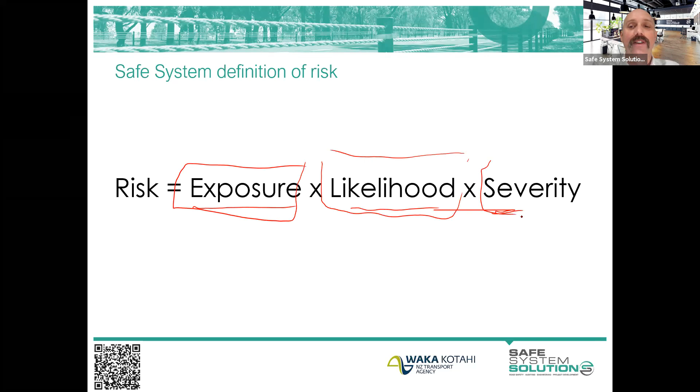And I gave you a few examples of things that influence the exposure the other time. So this one is still a little bit hard to see, but blocking off a road, an intersection, or the like alters the exposure, because the number of vehicles or pedestrians or cyclists will be influenced by that.

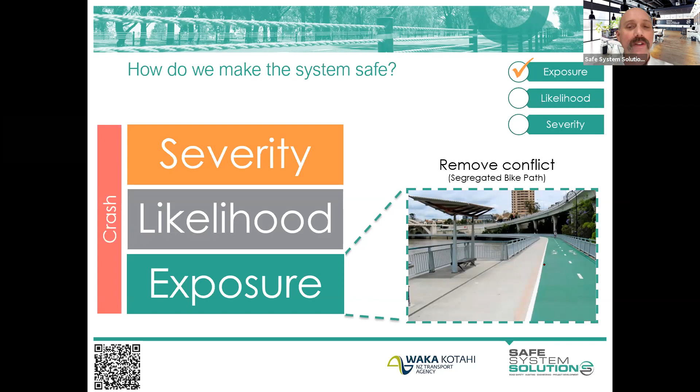The separated shared path facility changes the exposure, or removes the exposure, to vulnerable road user crashes with passenger vehicles. There's still a cyclist to pedestrian issue that could be present, probably a lower risk—definitely a lower risk issue than the passenger vehicle one. But those are some of the factors that influence the exposure.

This is actually out of the Safe System Assessment Framework document from Austroads. It's a bit of a definition which might assist you. Road user exposure refers to which road users, in what numbers, and for how long they're using the road, and are thus exposed to a potential crash. The measures of exposure include AADT, the annual average daily traffic, side road traffic volumes, number of motorcyclists, cyclists, pedestrians crossing or walking along the road.

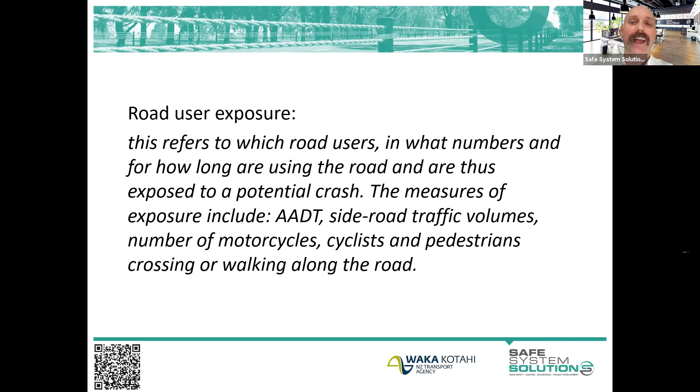It's fairly much boiled down to just numbers—the numbers crossing, the numbers walking along the road, and the like. The one thing that had a lot of debate in the 3 years since the assessment framework has come out was around the length of time they are exposed within an area. I talked about the size of the intersection as an example, because that one eventually got clarity and made everybody comfortable in a certain way that happens.

Okay, I'll pause there for any questions or comments at this stage about the assignment or any clarity around some of that exposure score.

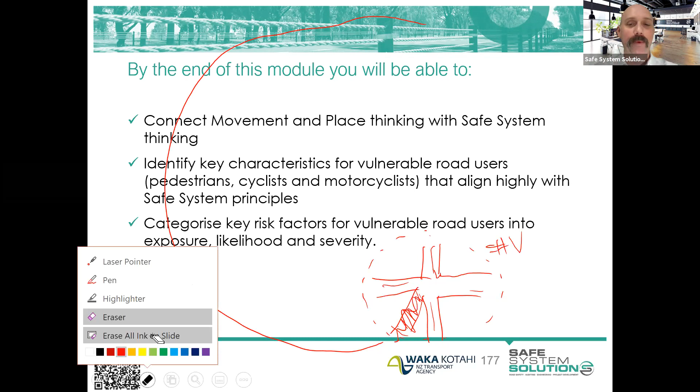Any other people have grievances on their score already? That's fair enough too—that's how we learn.

Well, the challenge, I suppose, was that we were trying to categorize these things with an end game of this assessment framework, which we haven't quite got to the details of. Now, in reading the assignments, I could almost see that some people had been using the Safe System Assessment Framework before, and others probably hadn't ever used that methodology. Anyway, overall everybody did really well.

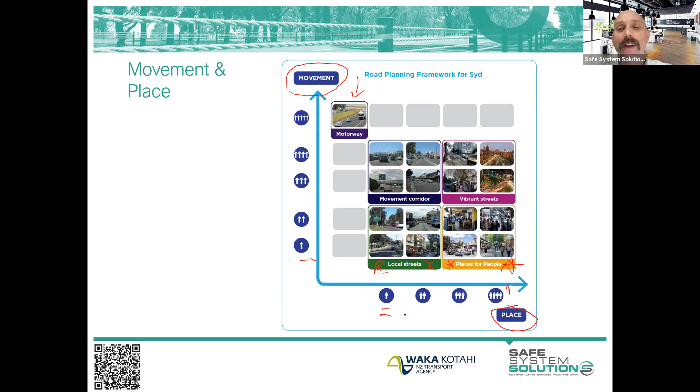Now, the challenge you have with local streets and the like is we start to talk about these as low place value. Obviously, the individual residents don't like us talking about their local street as low place value. But in the scheme of the whole network and the relativity of it, we sort of have these as low place value overall for the collective of the community.

But be careful with your terminology if you're out there doing your consultation and say, we made this decision because there's low place value here. That's not a good thing to say.

Then let's go up to an area that has low place value, but high movement function. And we see these are the movement corridors. And these are very much our large arterial roads, highways, and the like, which still have a little bit of place value to them here and there.

And then we've got these challenging ones, which are high place value, high movement, and under this framework, they're vibrant streets. Those are the really, really challenging ones because they're competing with all sorts of priorities there.

They want to make it vibrant and permeable for pedestrians, these exciting lively areas, but they're also trying to move people and goods through there in reasonable time. So they become the challenging ones.

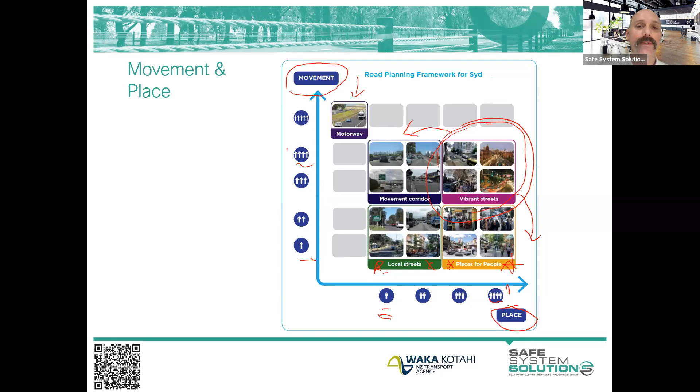So here we go. We've got areas, places for people, and trying to make it more and more vibrant. These are areas where they've been higher movement corridors, and they're starting to calm them down, at least in tactical urbanism senses, making them more places for people. And the COVID situation in a lot of the world has just accelerated a whole lot of stuff that's moved areas further into places for people quicker.

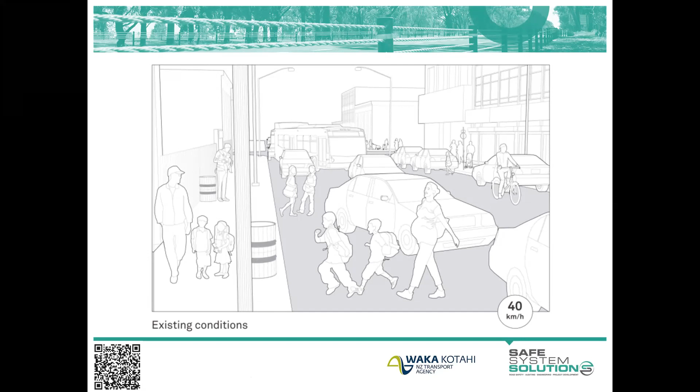So let's jump back to this exercise then, and just pop into the comments anything you want to alter to get us higher alignment with safe system principles, but acknowledging that this is a place for people, and it's being pushed by the strategic and urban planners to say, yep, we want this higher place value here.

Okay, seeing lots of good stuff coming in. Now, for those who have already put something in, what I'd like you to do is have a think about what you suggested and whether that alters the exposure, the likelihood, or the severity of crashes. So if you've suggested narrowing the road, is that exposure, likelihood, or severity, or a combination, depending on some different scenarios.

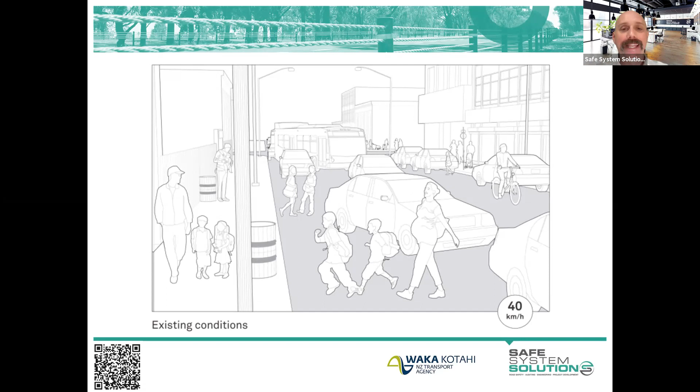Here's another artistic impression of the same one with more place value and a higher alignment with safe system principles. So a lot of the things that you were suggesting there in terms of widening the footpaths, narrowing it down, making it one way, and I would argue that even in this artistic diagram, that crossing point is somewhat not required, and we could make this whole area a shared zone area. And so vehicles are really the odd one out here, as in cars or even any trucks, which we'd hope wouldn't be going through there.

So because it was identified as a place for people, actively making it very hard for vehicles to go through there, and if they do, going at very, very low speeds, gives us a big tick in terms of safe system alignment, but also a big tick in livability, in place value, in this wonderful area to live and to trade and to have social interaction. And we really can get those speeds extremely down. 10 kilometers per hour operating speed, those sorts of things are possible in these areas.

But it really does require that work with the strategic planners and the urban planners to push them and say, what are we doing with this area? What are the aspirations? What do we want to see it like? And there's really good examples around the world and in New Zealand of this sort of thinking, quite progressive. There's areas of the world that still only see roads as movement corridors, and these pesky ideas of having it as a place are just getting in the way of pumping vehicles through there. We've got to understand that each road or street has its purpose.

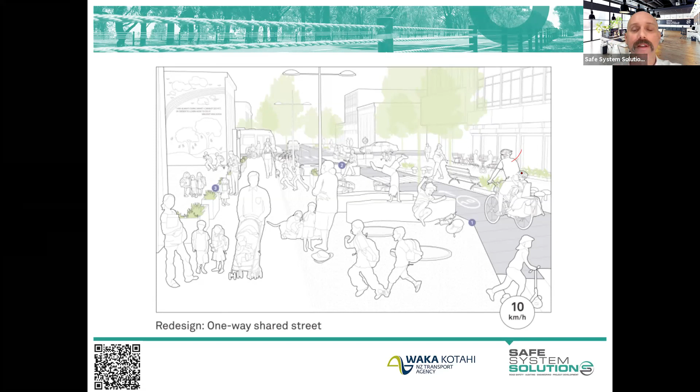So that was good. If that movement has risen up a bit in that it's still a place for people, but it's recognized - no, this is coming up and up for the movement requirements, and you've been pushing the strategic planners to give you more of a place function, or to be clearer on this, but they said no, the movement corridor is still important. You can start to provide some of this separation, but ideally we're going with that more integrated approach first, then step into the separation. You can see the cyclist facility and the roadway and any crossing points defined, very slow speed environment, a big wide footpath narrowed down, and quite a nice facility there.

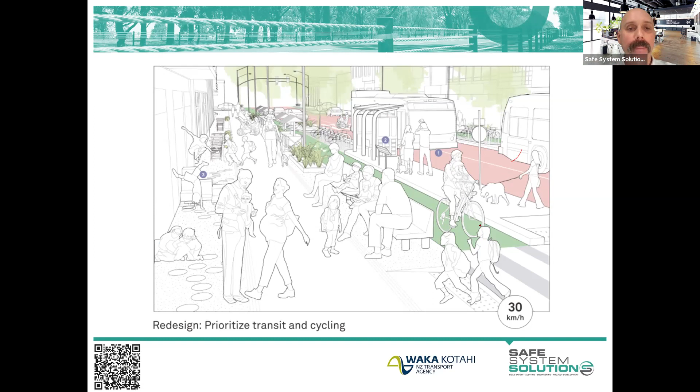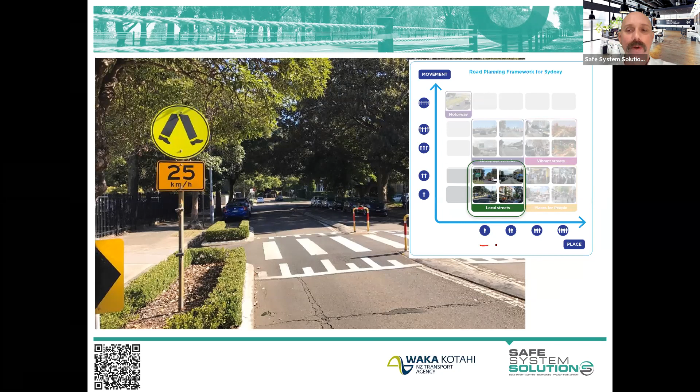When we get into the local streets, it becomes an interesting one where we're saying low place value - this looks like quite a nice green leafy street, a lovely place, but from that holistic place perspective, not providing us huge value. But nor is it providing this major movement corridor or movement function. It's really servicing to get people to their houses and maybe to collect their garbage and the like, but that's really the purpose of the roads and footpaths in these areas. Occasionally used as recreational areas too, which probably adds a bit of place value.

Increasing the vulnerable road user protection - the pedestrians, the cyclists - by narrowing things down, slowing vehicles, restricting vehicle movement through there. Because if it's been identified there as that low movement function, it gives us a real ability to leverage off that lower speed, and you can do that in many ways. You also get a benefit of even more place value.

I think people are quite aware of this sort of stuff we can do, but we have, as infrastructure engineers, for many years sort of utilized our local area traffic management as a road device, I suppose. But I think the ability to get lower speed through ramping up place value does make sense, because you get a much more livable area with that lower speed.

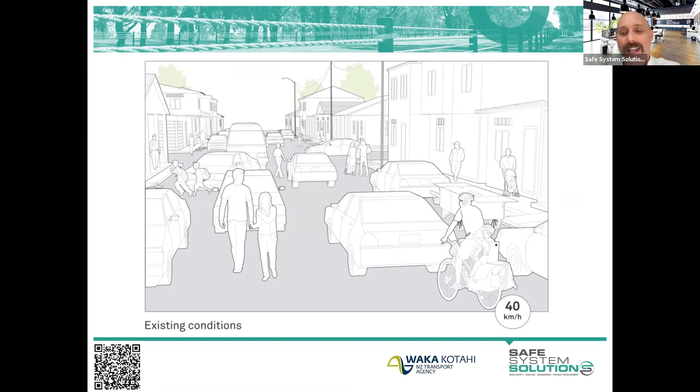So if I go back to this one, the idea of putting speed humps here or the like - yes, it would get us our safe system outcomes in terms of lower speeds and less likelihood of crashes and severity of crashes, but it really wouldn't do a huge amount for the place value of the area. But if we can do this sort of stuff, we've got just win-win all around.

I firmly believe in urban areas our safe system discussions with the community can be under the banner of increasing place value of their areas. I mean, that's what they want. Road safety is a little bit too abstract in the sense that the individual road user is so low risk as an individual in terms of road safety issues that it's hard to comprehend. You get a fair bit better response in these residential areas because they're worried about their kids and the like. But it's also that ability to have it as a place for people, so I think there's wonderful opportunities from that perspective.

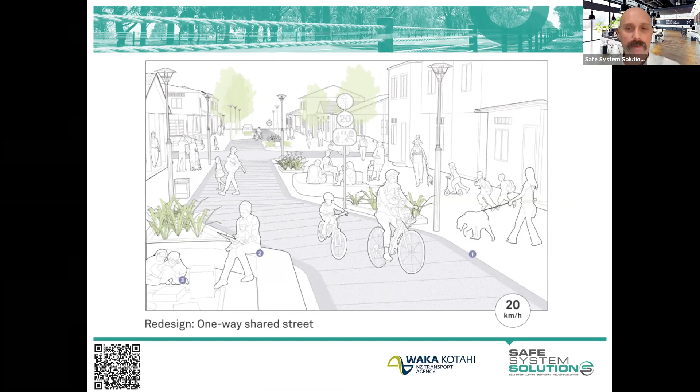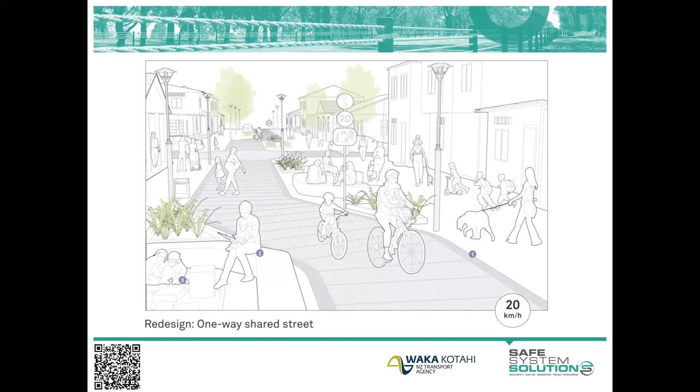I'm going to move to the vibrant streets, and the vibrant streets are hard. I was a project manager for an Austroads project called Mixed Use Safe System for Mixed Use Arterial Roads. Really, it's safe system for vibrant streets, how we could have retitled that with a bit more movement and place thinking. It was a while back when we did that.

Let's take this example - it's not too bad, because what we've got here is a bit of road currently dominated by movement. Let's do a hypothetical where the strategic planners and land use urban planners have decided they want this area to have a higher place value. We want more trade, more interaction, more people mingling. But we still need to keep that movement because it's the main north-south connector we have. So a very challenging task, as I talked about.

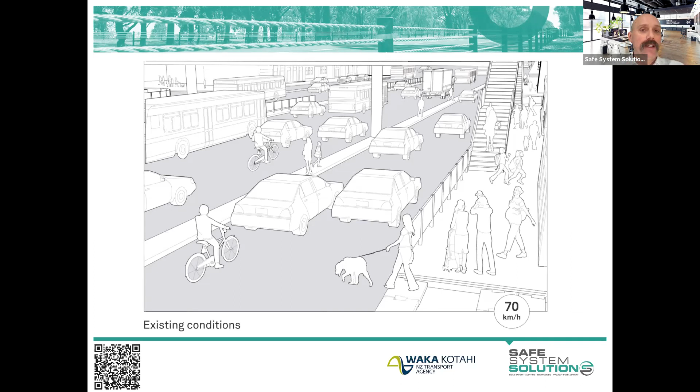Okay, let's have a look at this little artistic image and alter it a fair bit. You can see that separation, and what's important to remember is that this cycle facility is actually providing us movement function. A traditional traffic engineering look would say there's been a big loss in movement function, but we need to recalibrate our thinking a little.

One of those really good comments came in about how are we achieving this movement function. That gives us a lever to really protect the most vulnerable road users, being pedestrians and cyclists, because we're acknowledging that that's the movement corridor.

So when you try to build these big separated cycle facilities, it's often talked about as degrading the movement function. I'd say the opposite. If you're able to get people onto those bikes and you're increasing the movement function for people, it just happens to be that they're on bikes in this instance.

But you can see it's still got the movement corridor through there at a reasonable speed, around 40 km/h. We need to acknowledge in these areas that also hold high place value that we're going to have interaction with vulnerable road users, and these reasonable speeds call for a lot of encouragement of control and ideally speed

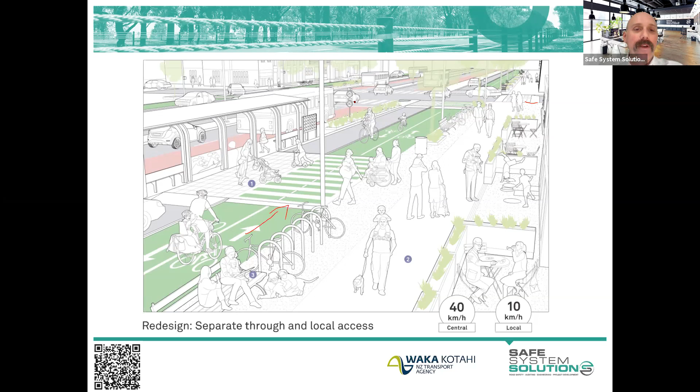We're seeing those separated movement facilities for cyclists, which are a good way to deal with things. You're also getting these protected intersections appearing around the place, trying to still cater for that movement function while separating the cyclists through the intersection. Lots of different examples of those coming around Australia, at least. I'm not sure if New Zealand's got any protected signalised intersections yet, but you may.

When we land in this sort of clear movement categorization but it still retains a little bit of place value, what we're into is actively trying to continue to reduce the place value, I suppose. That may sound bad, but we're really pushing the movement

function of these areas. That does mean we may restrict vulnerable road user access or permeability, or the interaction and trade in those areas, and try to increase movement there with completely separated cycle facilities, so speeds can be maintained high from other vehicles as well.

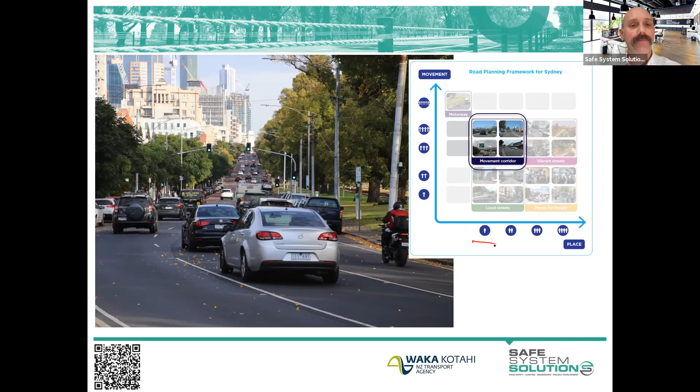Even with those high sort of movement corridors, and if passenger vehicles are sort of what has been said, and trucks are the way that they want to do this, you still think about your energy and conflict points and slowing vehicles at these conflict points to try to minimize the harm that happens.

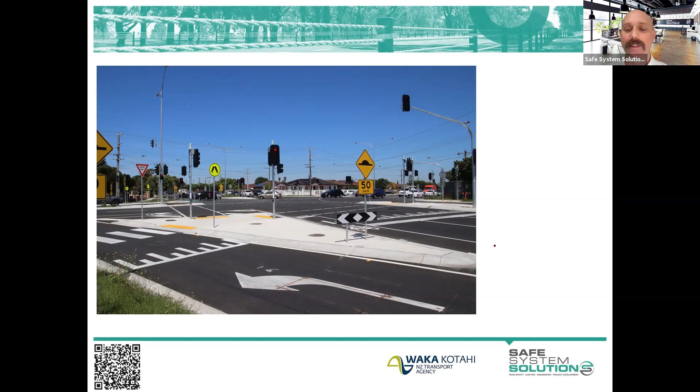So cyclists and pedestrians obviously are most vulnerable to injury, severe injury, with around a 10% risk at 20 kilometers per hour, and almost certain death for a direct strike at around 50 kilometers per hour.

Now the young and old are even more vulnerable, vulnerable to physical force, but also more prone to mistakes. And there are some really good Austroads reports - they're old, but they're great - that looked into the capabilities of older road users in terms of some of the challenges and how infrastructure can play a role in that.

And there is quite a bit of focus, and there always has been, on young road users, especially around schools, and how we can design for young road users.

So we want to ideally manage our speeds to around 30 kilometers per hour, if possible, where pedestrian volumes are significant. Otherwise, seek to separate as we increase them.

And we talked a bit about these separated facilities, which are coming online and are really seen as excellent. Have a look at the fact sheet for whether they influence exposure, likelihood, or severity.

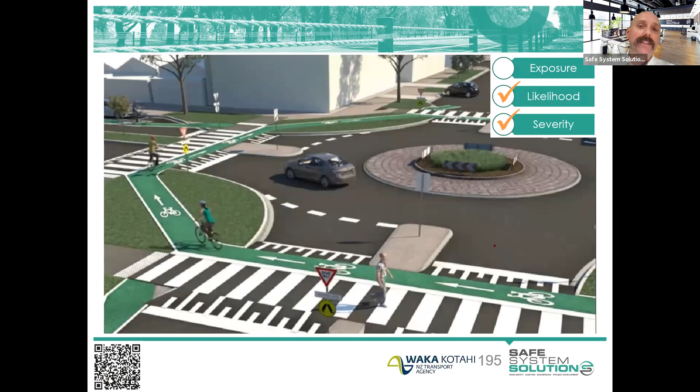Roundabouts - we talked about in module 2 about them being this great facility because they reduce speed, improve conflict angle, and wake people up because there's something there and they're going through an intersection. Nobody has ultimate priority as they approach. The movement of pedestrians and cyclists around roundabouts has been problematic for a number of reasons.

This is, I suppose, the Dutch way of looking at roundabouts for pedestrians and cyclists, and it's something we've gravitated towards. You see a facility like this having raised pedestrian priority and cyclist priority around the roundabout, and so we get almost the best of all worlds out of these scenarios.

And I think that one's been built - that's Moray Street in South Melbourne. So I could share some photos of the built product, and it's working beautifully. We did an evaluation of that treatment.

The theory sort of holds for bigger, higher speed roundabouts to a degree. So here's sort of a conceptual level of how you could have separated paths, and if one leg was more minor, the priority could continue through. To do the right-hand turn, you'd come in, out through here, pause, and stagger your crossing points.

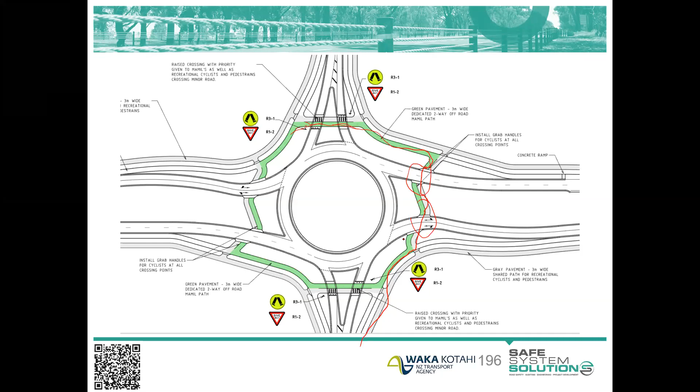There's a little diagram here showing that in lower speed environments, sharing of road space between cyclists and vehicles is a possibility, maybe up to around 30 kilometres per hour as the upper end. As speed increases, you want to physically separate them, and parking can be a way to do that. Then, for the highest end speeds, you want completely separated off-road facilities. That's an adaptation of a Dutch diagram.

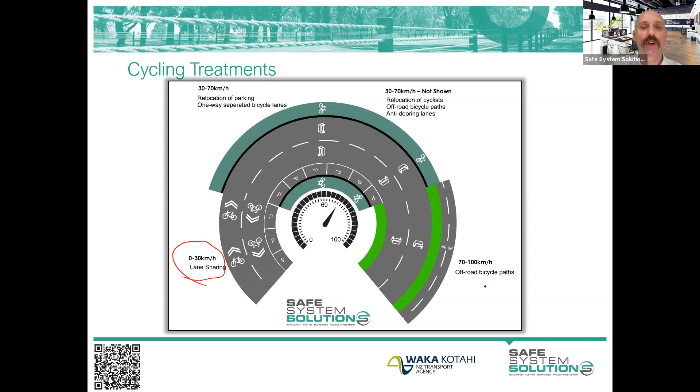What we see is that a raised pedestrian crossing will influence both the likelihood and severity of crashes. But interestingly, just an at-grade pedestrian crossing, without the raised element, doesn't provide much road safety value, and in areas with reasonable speed it can sometimes go the other way. A normal zebra crossing can actually increase road trauma in a lot of situations.

So my basic first assumption is that if we've decided a point has enough pedestrian demand, or enough latent demand where building something will generate that pedestrian activity, then we've also got the warrant to slow vehicles down using a raised platform. Or if you're concerned about buses, maybe some speed cushioning on the approach which buses can straddle.

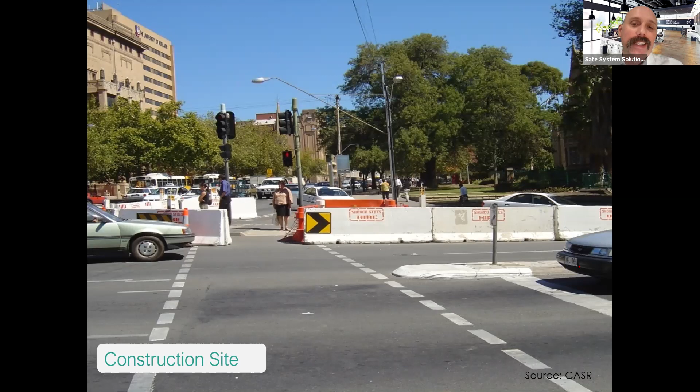So I like to use this little example to say that we kind of know what safe system is for pedestrians and vulnerable road users, and we've known for quite a long time. We just haven't thought about it in that way. So this is an area in Adelaide quite a long time ago, and it was a 60 km/h road, and there were some workers who had to do some work in the island here with the electrics and all this sort of stuff. So they were out there for 3 or 4 days or something like that, and these two workers being exposed to the 60 km/h vehicle risk was unacceptable from that workplace health and safety perspective.

And so this got the protection with the barrier systems. It actually in South Australia gets a 25 km/h work zone speed limit. They use 25 km/h. So vehicle speeds are 25 km/h. Protection using barrier systems. And then the work finished, and they took away all the barriers and they put the speed back up to 60 km/h, and about 3,500 to 4,000 pedestrians a day stand right in these areas where those workers were. So we know the vulnerability is the same.

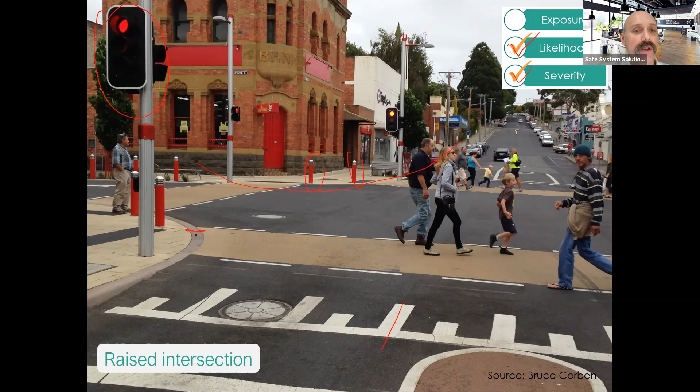When you're raising a whole intersection, this is just a little aside, these become quite important in terms of the swept path of large vehicles, because you remove any sort of curbing. So having something to stop that becomes important. Little tip there. And vehicles turning in and then something raised as a threshold, but also a great crossing facility is good. And I like this area where a vehicle can store as they've darted in. So those are, again, good for likelihood and severity of crashes.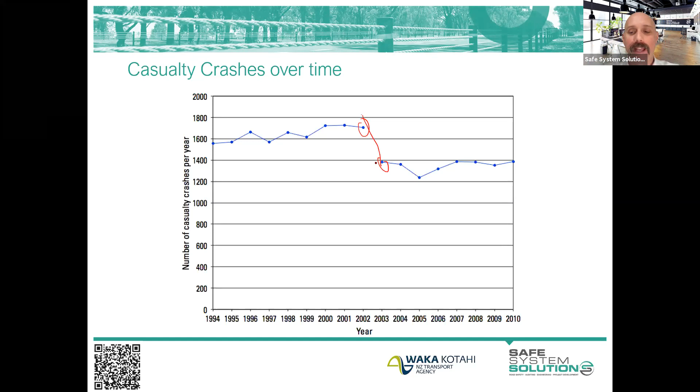Okay, any questions or comments before I have a brief discussion about motorcyclists? No, good to carry on, Ken.

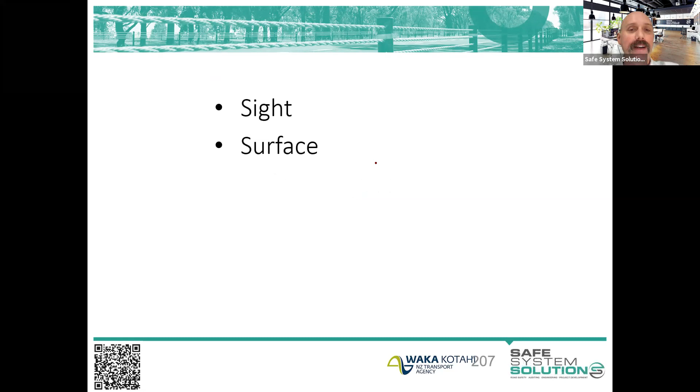Okay, motorcyclists is an area that I have done a lot of work in over my time and done a good bit of work in New Zealand with motorcycle safety, which has been rewarding. These are the sort of 5 things I like to think about for motorcycle safety: sight, surface, signs, strike and speed. So strike being what is the motorcyclist hitting or what's hitting the motorcyclist in a crash.

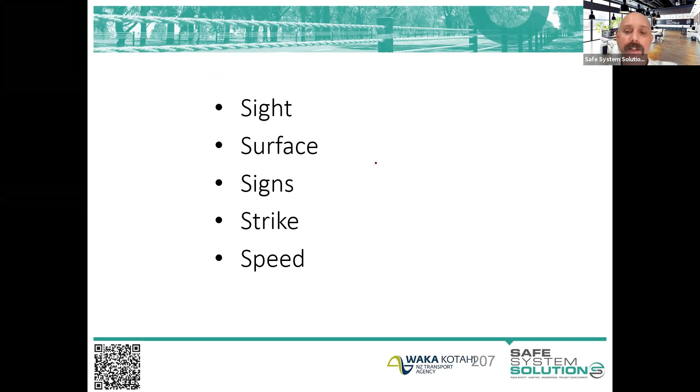And when we look at likelihood or severity of these things, so being able to see a motorcyclist or a motorcyclist being able to see what's coming up, the surface on which they're riding, and the signs to warn and guide, they're all likelihood factors. They're going to influence the likelihood of the crash. Strike means a crash is happening, and this is all then about the severity of the crash.

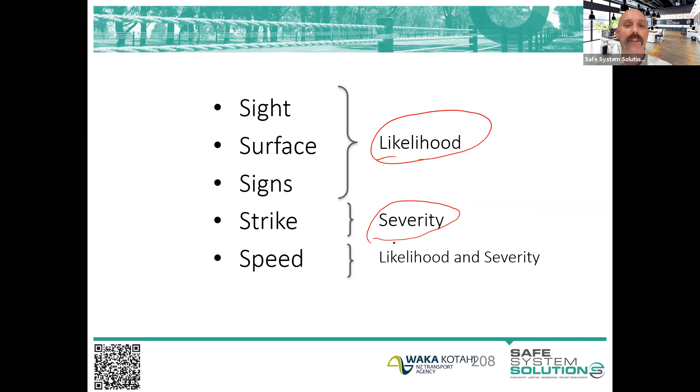And speed's our magic little thing in road safety, isn't it? Because it influences both the likelihood and the severity of any crash, because there's more time to see something, to react, to avoid. But then if the incident does happen, it's at lower speed, and biomechanical tolerances and physics just come into play, and we get less severe outcomes.

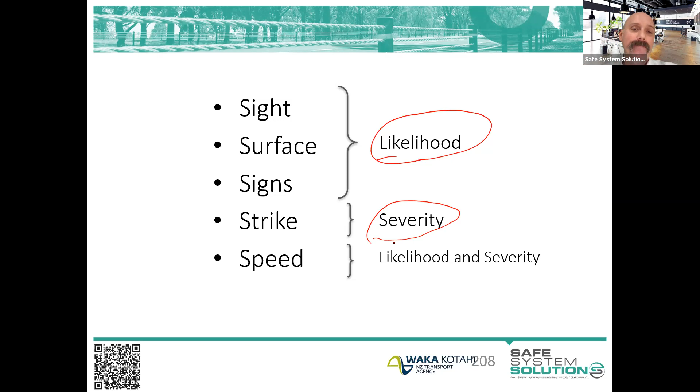So there's been some really groundbreaking research done by some Swedish people with a colleague of ours, Johan Strandroth, who worked in Victoria for a couple of years at least, and is now back in Sweden, but still working with us. This was to understand some of those crash curves for motorcyclists. And I've popped these into the notes so you can have a look at them later, but they're slightly altered from what we originally thought for motorcyclists, which was just to lump motorcyclists with pedestrians and cyclists, because we didn't know what else we could do.

We see slightly altered curves in terms of the highest level serious injury, so an MAIS 3, which is the high level serious injury, sort of acquired brain injury and quite severe injury, and fatals up there. So you can see some of these curves with different crash types. So I encourage you to have a look at those.

And motorcyclists are sort of in this challenging position when we think about providing infrastructure or even legislative things or the like, where we sometimes treat a motorcyclist like it's a car, and sometimes we treat a motorcyclist like it's a cyclist or a pedestrian. More often it's really like a car, but we know the severity outcomes are significantly different to a car. So it's a very challenging road user group.

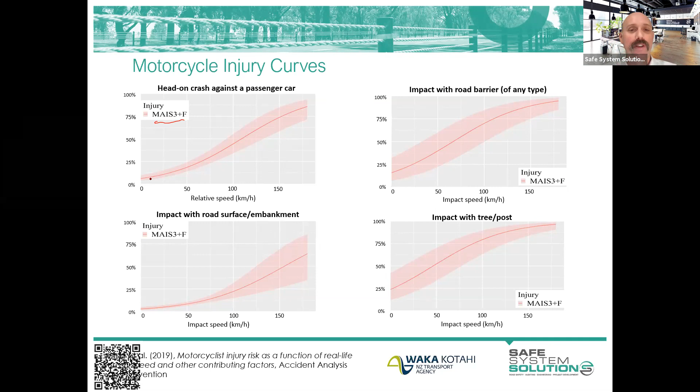The surface, so motorcyclists are obviously leaning and with two small contact patches on the road, meaning that any surface issues increase the likelihood of motorcycle crashes, again, more than any other road user, really. We often refer to motorcyclists as the canary in the coal mine in terms of surface issues, because they're the first to be killed or seriously injured when there are these surface issues.

And so we need to be, I suppose, especially looking at that in our safe system assessments when we're thinking about motorcyclists. And motorcyclists are their own specific categorization under a safe system assessment, which we'll get to next module, exactly how you need to go about thinking about this.

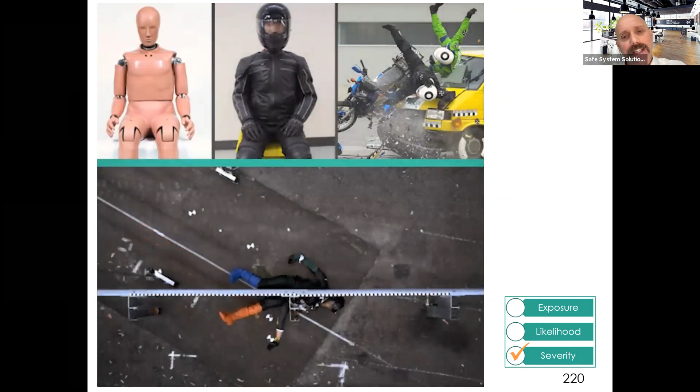And you run it at 60 kilometers per hour. You slide the motorcyclist head first at the post. And you can see that at 60 kilometers per hour, that does significant damage. But if you've got underrun protection of some description, the damage is far less. And in fact, it goes well within survivable levels at 60 kilometers per hour for the motorcyclist with the underrun protection and a way to absorb energy and deflect energy along the system. So I hope those videos are streaming for you. And there's certainly quite a number of underrun protections available for motorcyclists with barrier systems. And so those are a good thing to be looking at.

The thing with motorcyclists and barriers is that it's somewhere probably around 20% at most of motorcycle death and serious injury involves striking a barrier. It's probably a bit less than that, but generally around that. We've got quite a number of motorcycle fatality and serious injuries where we can't get any accurate description of what was struck in the police reporting. But if you assume a lot of those were barriers, we're up at maybe 20% at absolute most. When you drill into what type of barriers are being struck, almost all of them are a W-beam system, like the one we're seeing in the test here on screen.

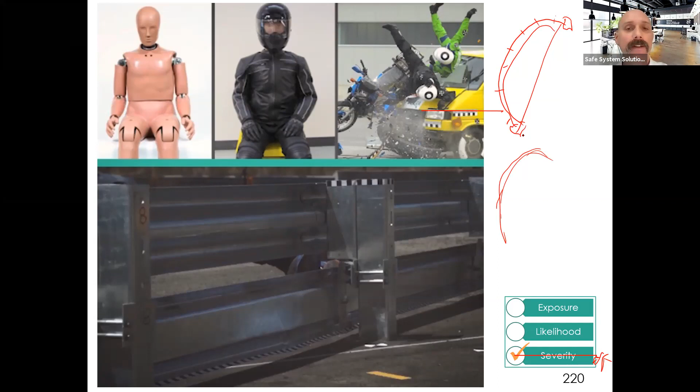But the MAG in New Zealand, the Motorcycle Advisory Group and the like, a number of the members on there are quite understanding of the research and are quite reasonable in that sense. So you've got some good industry representation there that can assist.

Yes, Kathy. Oh, sorry. No? Yeah, sorry. Oh, okay, I thought we had questions or the like.

So speed, obviously a big one across the board in terms of reduction in the likelihood and the severity. It can be done through advisory speeds, chevron alignment markers, delineation, narrowing roads - the list just goes on and on. And also the regulatory speed limit reduction. These all reduce the likelihood of crashes, and the severity to a degree. Reducing the speed from 110 to 100 or the like is not going to significantly reduce the severity for motorcyclists, because we're dealing with levels of trauma that is easily enough to kill the motorcyclist. So the severity comes into play at different points.

I'll pause there and see if anybody wants to have a little bit of discussion about motorcyclists, and then I'll briefly explain what we're going to do next module, priming you up to get you out doing a safe system assessment. So any comments or questions come in there?

No, but Joseph, who got the question right about the barrier earlier, runs the barrier training in New Zealand. Definitely been to the barrier training, runs it. So very good.

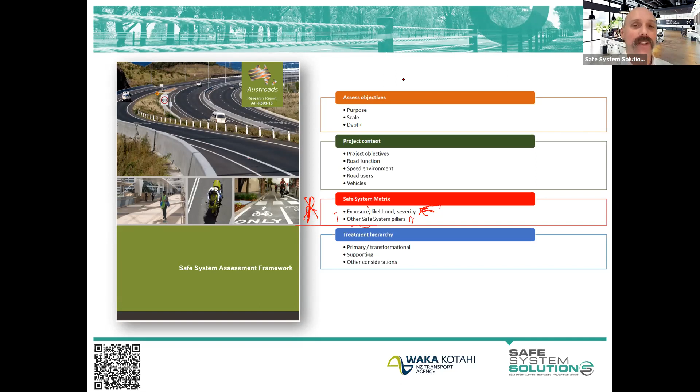You've started practicing thinking about road environments and categorizing things, and you'll get more clarity on that. Next week I'll take you through a worked example and show you how to actually find scores to put in there. Then we want to think about the other elements of the safe system, or the pillars as they were called back then - I'd say elements. This diagram is straight out of the Austroads document; the term pillars is used because I'm talking about that interactive element. Then we go into the treatments - those are the main things. These are important in terms of setting your context and how deep an assessment you're going into, but we'll go through that.